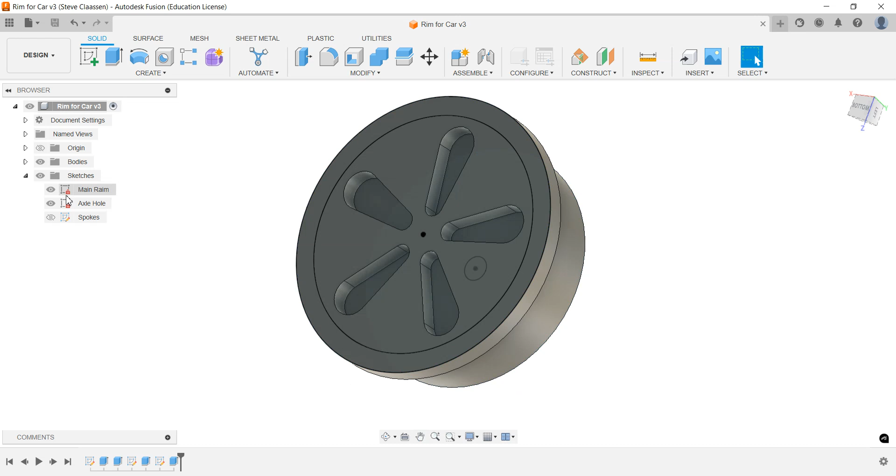All right, so we have our rim now. Now we need to start modifying and customizing things. First off, let's say I didn't want 5 spokes, I really wanted 6. So I'm going to turn off all the other sketches, turn on the spokes one, double click it, and go into it. Now I want my spokes a bit wider, so let's go 1.1. All right, there we go. Perfect, we hit finish and it automatically does that.

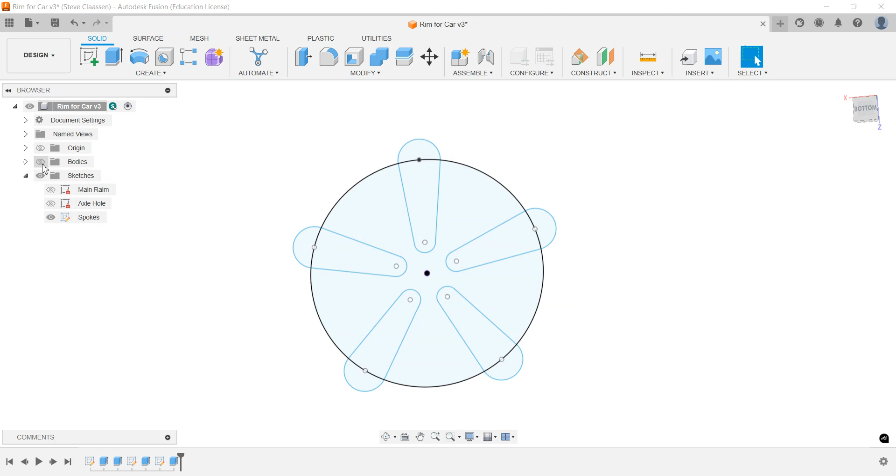Uh-oh, I've gone through here now. Now what? Well, I can go back to the main rim. I'm going to turn the whole body off and the spokes, and turn on just the main rims, and go into this one. I wanted my main rim at 1.4, and the outside one at 1.6. I hit finish sketch, and as soon as I turn the body back on, you can see it's already modified out to that right distance.

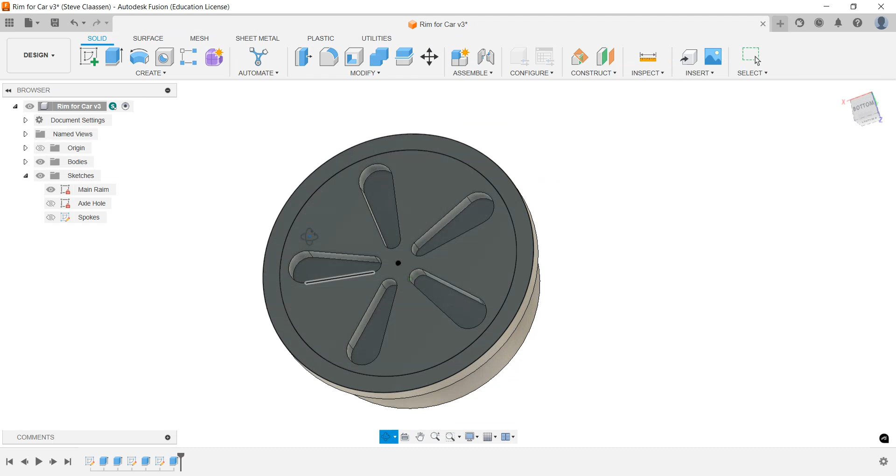So what I can start doing now is playing with this and adjusting things. What happens if I wanted to round some edges? I could take this and say I really want this edge rounded. I go to fillet, grab that edge, and change that, basically drag it. I can say, okay, I want that. You can see I can continuously update stuff.

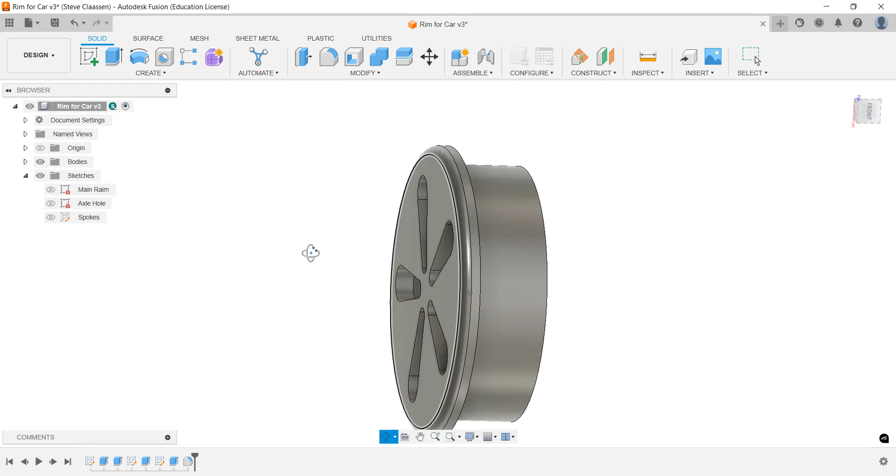If I don't want to see the sketch things, I turn them off, and now I can see what the rim's going to look like. So as we do this, go back into the spokes - no, I really wanted 6 spokes. I come in here, see this little icon, double click it, and say no, I want 6. Click OK. Now it's 6 instead.

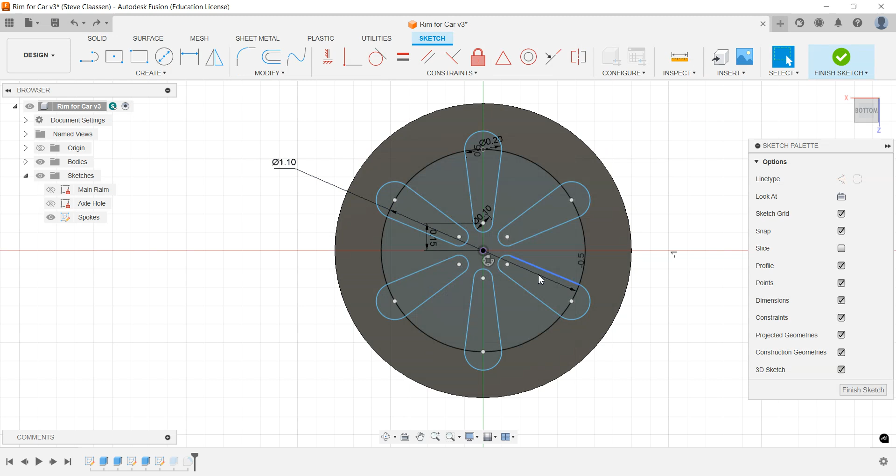So it's easily customizable. Whoa, what happened there? Let's just go back, Control Z. There's 1, 2, 3, 4, 5, 6. Hit finish sketch. That's weird - because the 6 are there, but I didn't do that. So I wonder, oh geez, we might have to re-extrude it. So how do we do that? Because it added, it doesn't like that.

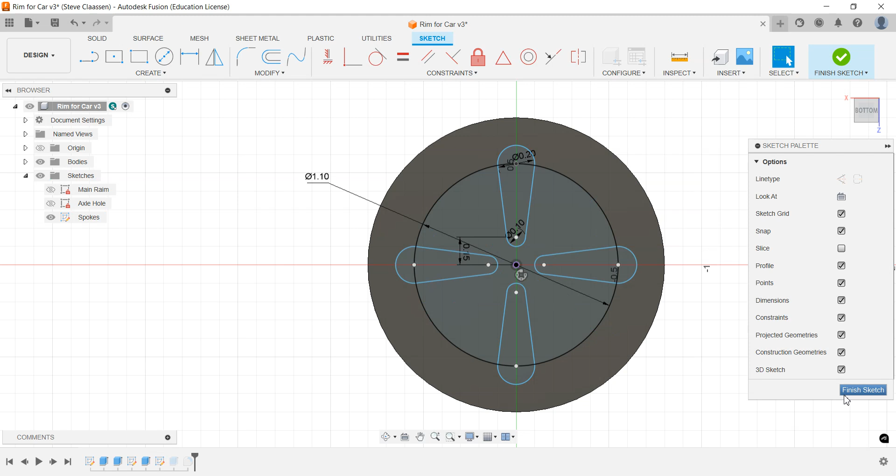Now what happens if we were to take away? If I go like this and say no, I want only 4 of them instead of 6, and hit finish sketch - oh, now none of them are there. So what we'd have to do is, let's say I want 4, I finish sketch. Now down here in the timeline, this was the last time we actually extruded. I'm going to right mouse click and delete, turn my sketch back on. Then I'd have to go back and extrude my 4. So there's times where you might have to delete something to be able to do it.

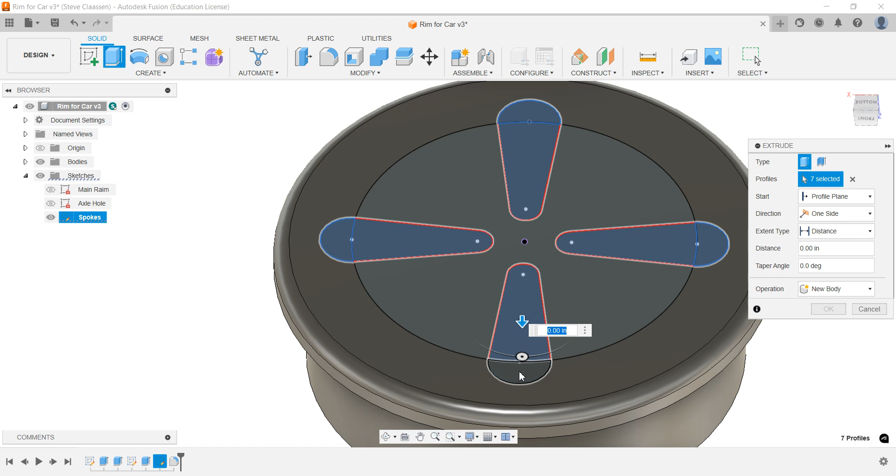So I hope that makes sense. Basically I'm going to go back in, and okay - at this point you can play and see what you come up with. Design your rim. Certain things you have to know: again, we're going to 3D print flat down like that, so you can't really indent this much because otherwise it can't print in space.

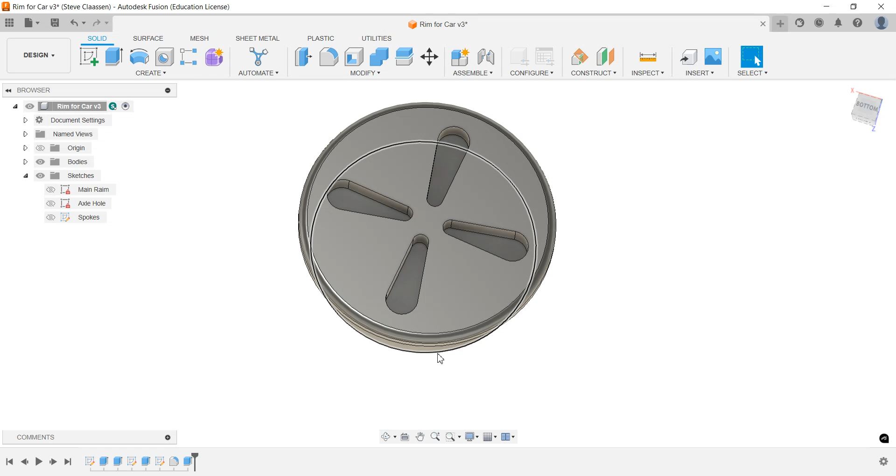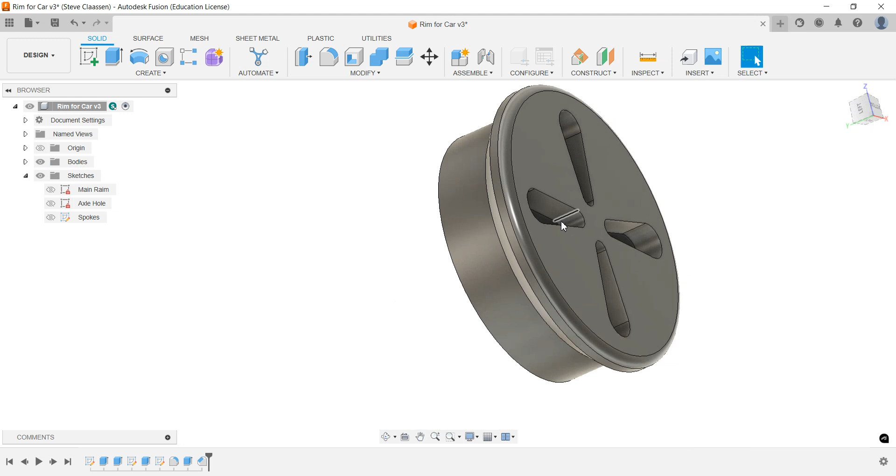So this surface has to be flat. The only way we can change that is if you wanted to print it this way - this ridge couldn't print unless you came into modify and chamfer. We could chamfer this - can we chamfer this out a bit? Yeah, we can, okay, we could do that. What you're left with is a rim that has an edge like that. So when I do this flat, you could see it could 3D print flat, and then come up on the angle and build on top of itself to get out to this.

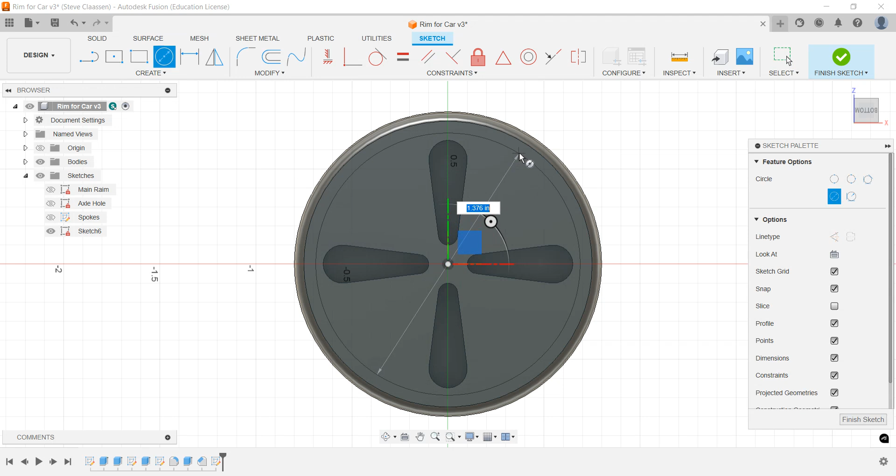In that case, if I did that, you could take this middle and draw a sketch on top - draw a circle on top, and say right there, from there I actually want to cut down a bit. Finish it, extrude, and we could drop it down in. And all of a sudden now it looks like that.

So I'm going to let you play. There's ways to do things. You might want to ask me for some final advice on doing things, but there's kind of a finished product. I'm going to save it right away - but there's kind of a finished product of a rim that is at the start.

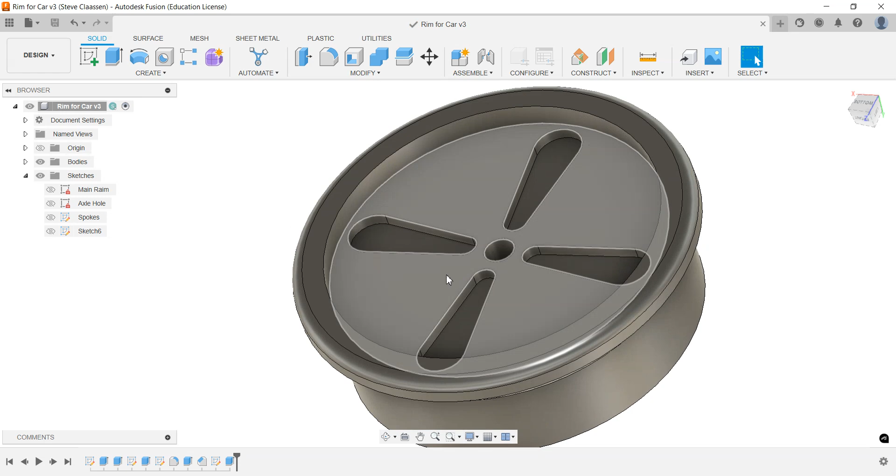And again, geez, I don't know, fillet the inside of this. What does that do? Oh, that's kind of cool. Now you can only go so much. Click OK, and now you can start seeing the design coming out.

All right, so that concludes the tutorial. You can play, tinker, do whatever. I can put a nub on this now if I was going to print it this way. So I'm going to let you play. Have fun.